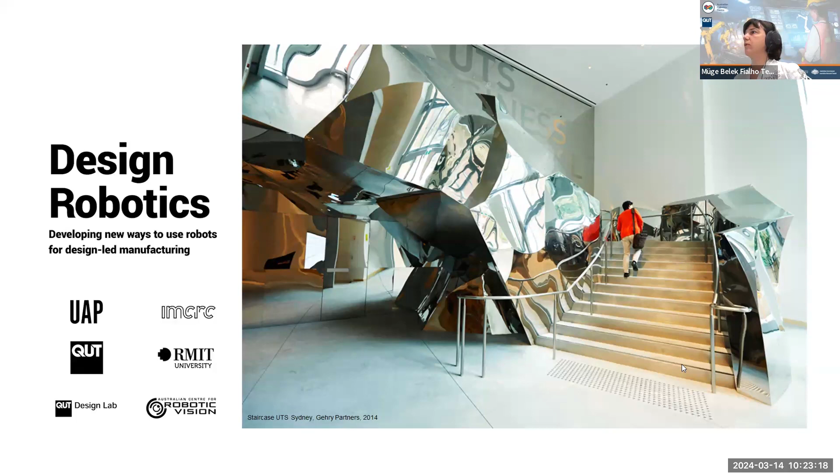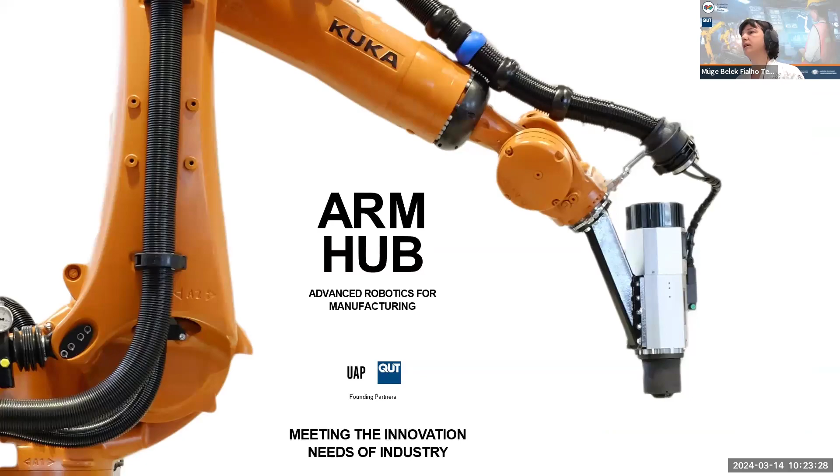It all started with my postdoc role at the Design Robotics project with QUT and UAP, where it was the first time that I started engaging with robotics technologies around the year 2018. That grew into my background, and I became part of Arm Hub, where I get to meet with industry, and now I'm part of the Australian Cobotics Centre.

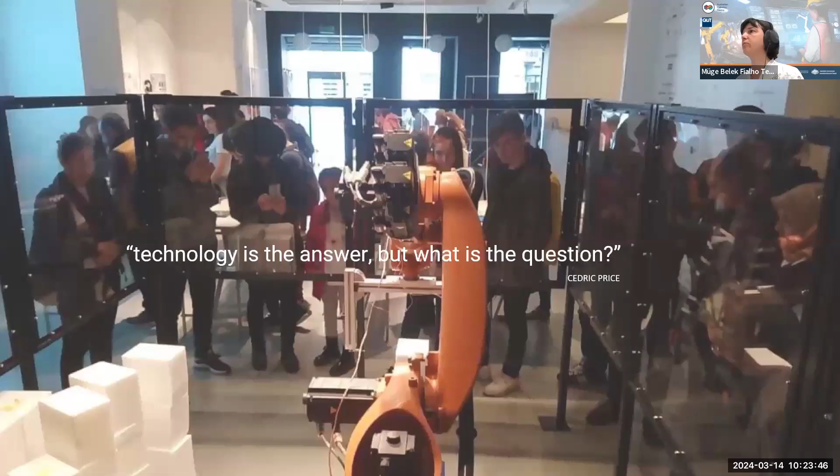So as a junior researcher who started as a postdoc and grew in this area of research, I have always been part of these very supportive and collaborative groups. So I wanted to discuss the topic of, yes, we know technology is the answer to our problems in this upcoming world, but as Cedric Price puts it, what is the question that we are trying to answer?

And we need to really think about how we engage with technology and how we use it, especially in today's conditions with the need for addressing the Sustainable Development Goals. How are we going to allow technology to solve the problems of today and for the future as well? So my research is really looking at these topics, and RoboBlox is a way to address the sustainability goals.

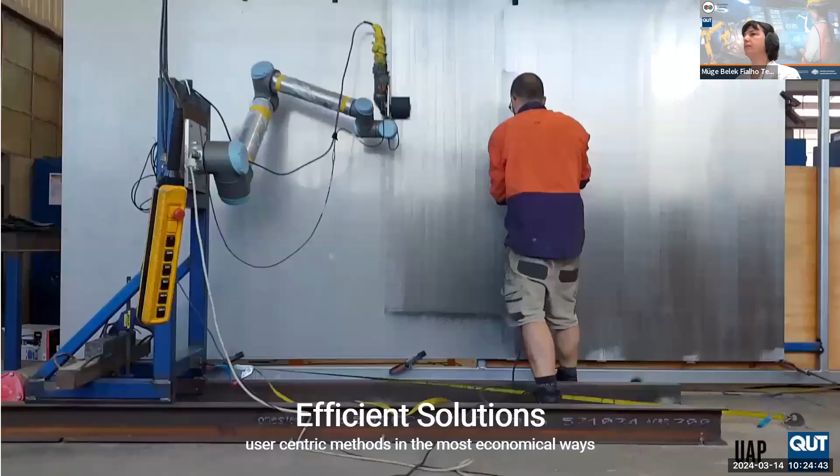So I believe in order to address the issues, we need to be more efficient in our ways of building and constructing. So we need to look at more user-centric methods, more economical ways to actually engage with the users of these technologies. But we also need to find optimized solutions, which are designed and built to use fewer materials, more efficient, more durable, and new efficient ways of constructing.

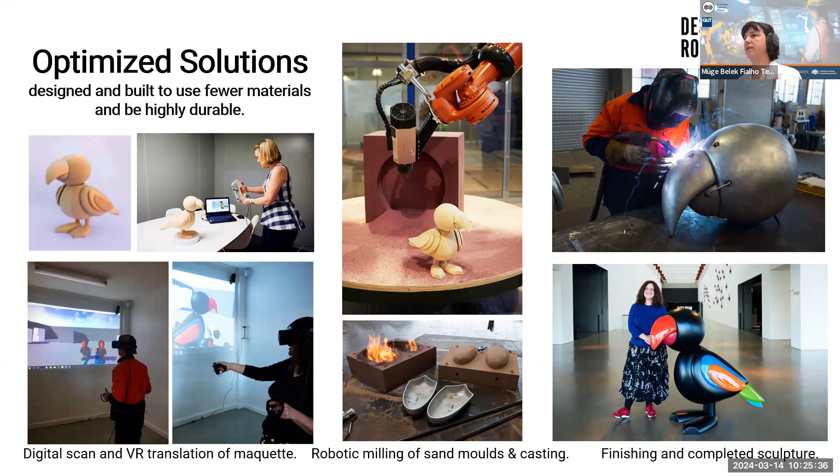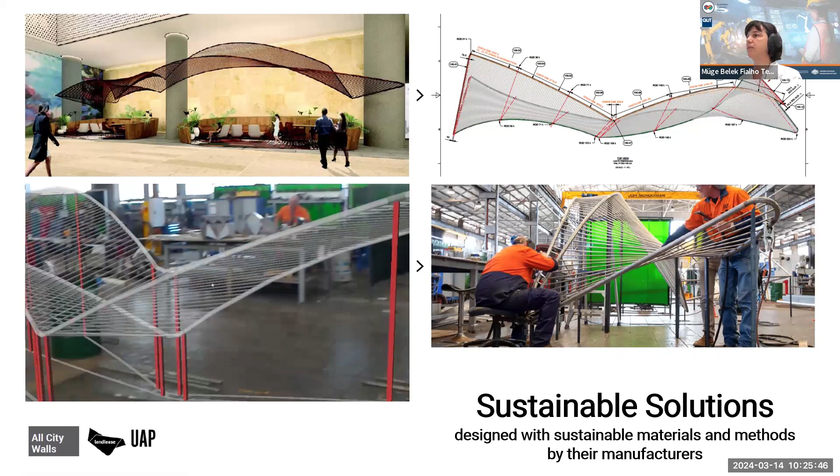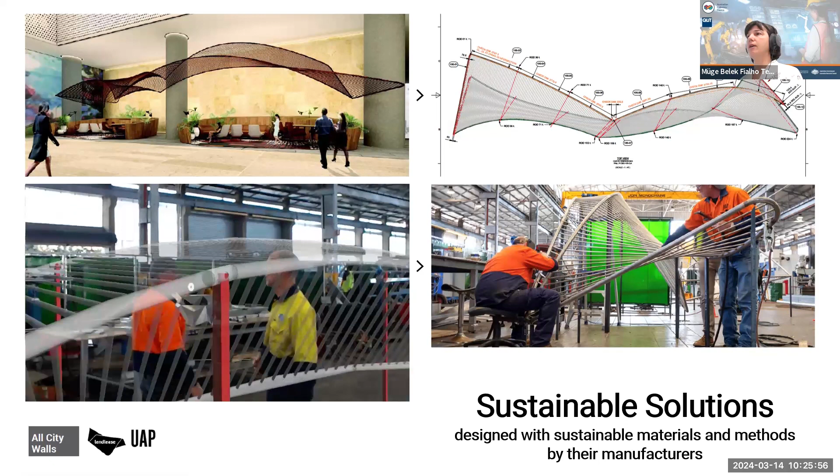So that's why the way I use computational methods and look at design to fabrication is the pathway I see in these optimization processes. And we need to look at sustainable solutions. And this is not just looking at sustainable materials and methods, but also involving the existing workforce and allowing novice users to engage with these technologies to have a more sustainable outcome.

So most of my research is looking at this type of digital design to physical fabrication. I believe that this way we can empower the designer to be more in control in material manipulation and the manufacturing processes, and also allow opportunities for embedding different systems and sensors into their design workflows.

So I use this software called Rhino Grasshopper, which is a 3D modeling software for designers. It was actually initiated for industrial designers. It was a software that would allow you to do 3D scanning and then also create these more fluid geometries, which are more ergonomic for the human body. So industrial designers started to explore these dynamic forms.

And in architecture, we realize as we are thinking in this geometry and the spatial way, we can actually engage with it in a way that we can design any form and then think about the way we can manufacture it. So find ways to actually create these kinds of digital to physical workflows.

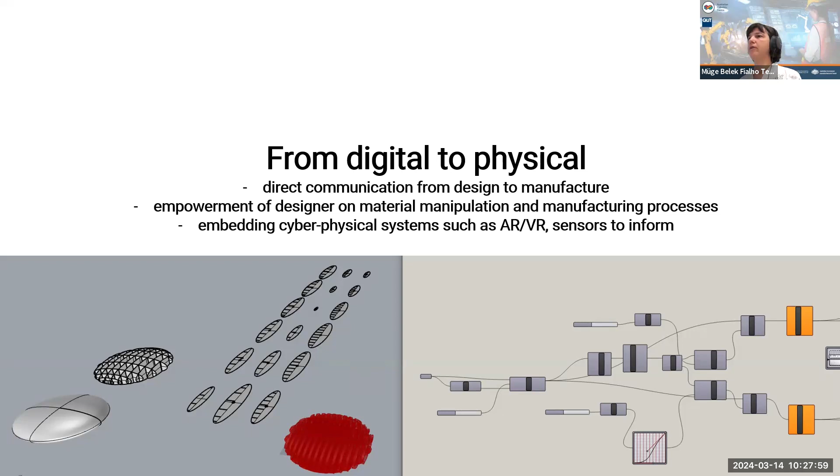And then it started to evolve into this visual programming language, which you can see on the right-hand side, where, again, as designers, we are very visual. So we start connecting different elements, writing some code to bring in other sensors, embedding Arduinos and other tools to create that kind of feedback loop from the environment.

Going back to RoboBlox, the first opportunity arose when we were invited to participate in this Istanbul Design Biennale. And the topic of the Biennale was a school of schools. So it was about the learning and the teaching of these technologies.

And we were invited by this group, Istanbul-based designers called FAB, which had this industrial robot, and they wanted to place it in the art gallery, and they wanted to invite different people from all over the world, so that everybody could show their design thinking and design processes in order to build the exhibition over a period of time.

And as part of this proposal, they wanted us to engage with students and run some workshops to be able to teach these technologies. So for us, it was a great opportunity because we were also just about to start our learning of using the robots. We had just purchased our UR10s, and it was a way to accelerate that knowledge for us too.

So the FAB group, they gave us different themes to explore as part of this exhibition, and our team was emergence. So we went back and looked at this Morpholo game, which was designed by Thieri Foulc at the time, where they were looking at creating these very organic design tiles, ceramic tiles.

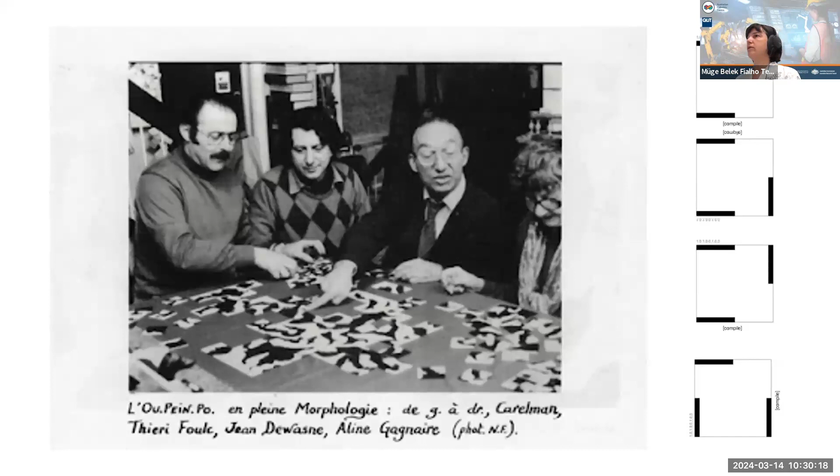So we took this two-dimensional game and started to explore ways how we can think about it in a three-dimensional manner. So here you can see Jared and Ellen acting like the robot in the workshop, and looking at ways where we can create these three-dimensional forms. And it was really a hands-on experience around understanding material, understanding how a craftsman would engage with a material process and build upon it through that manner.

And then those explorations, we wanted to engage novice users because we knew that robotic processes were not so easy and accessible for people that had never even seen a robot before. So the idea was to create this website, and you can still play the game if you go to JaredDonovan.com. You can see the Morpholo Games versions there.

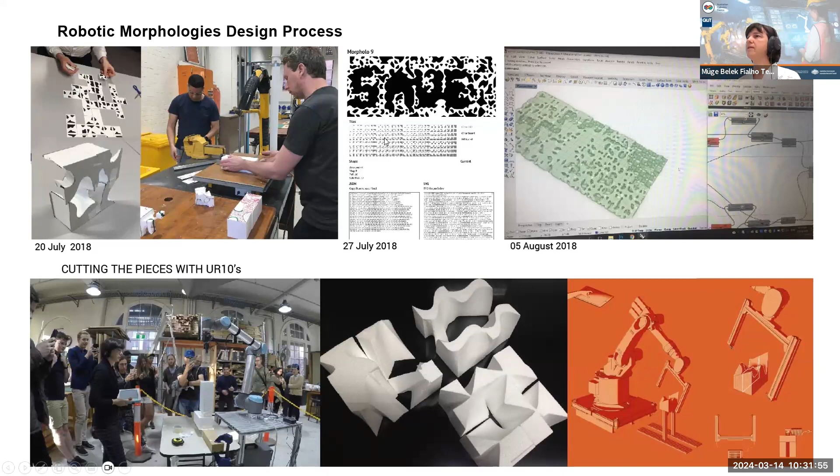You can go into this website and design your own patterns, and then the Grasshopper Rhino code would take those patterns as a JSON file from that server and then create a three-dimensional form. So we did some tests with the students. They came up with some designs.

This is the website where you can go and engage. So you can see the edges match, and then you can play with the rotation of each tile. You can manipulate the curves as you like, whether you want to have a more geometrical surface or a more fluid surface, and then you can change any tile as you like to design different patterns.

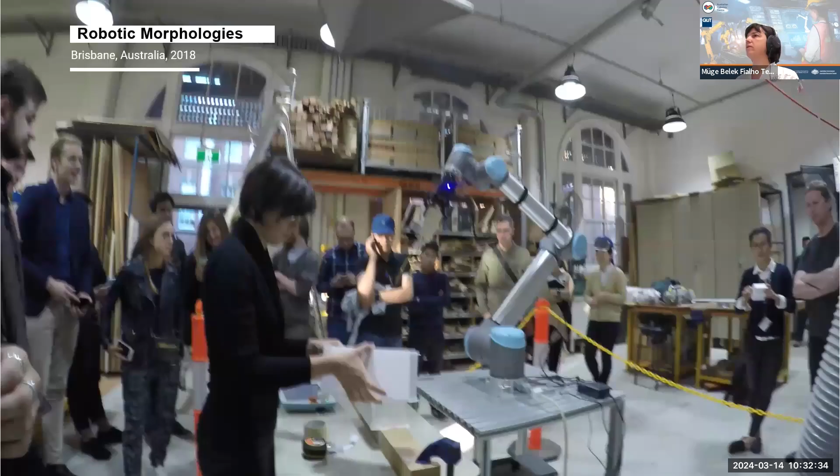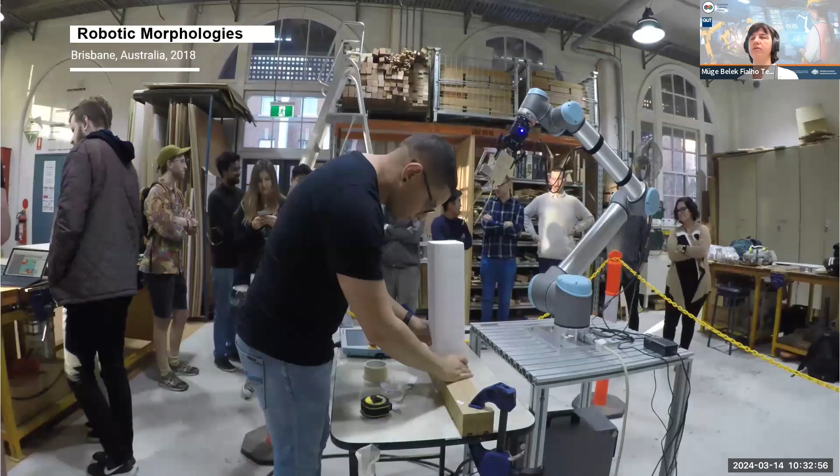And here are some of the examples of what each student could come up with, testing the potentials of such a system. So going from this interface, then we did a demonstrator where this is the first time we took an existing handheld hot wire cutter, a hobby tool, to go and cut one of the blocks in our J block. And it was a very exciting day for all the students because they had never seen a robot doing anything in a workshop.

So here you can see that workflow. This is the interface of our software where we can see in 3 dimensions what we are designing, and we can also simulate the robot's movements based on that. There are different plugins that you can use, depending on your robot type.

So if you are using a KUKA robot, then there's a plugin called KUKA PRC, and it has a very big community around it. It has a forum where you can ask questions and find out what other people have done with the software. There are free tutorials as well.

And then, what we are using currently with our URs is the Robots plugin. So that's also an open source plugin where you can control different types of robots like KUKA, URs, FANUC, ABB.

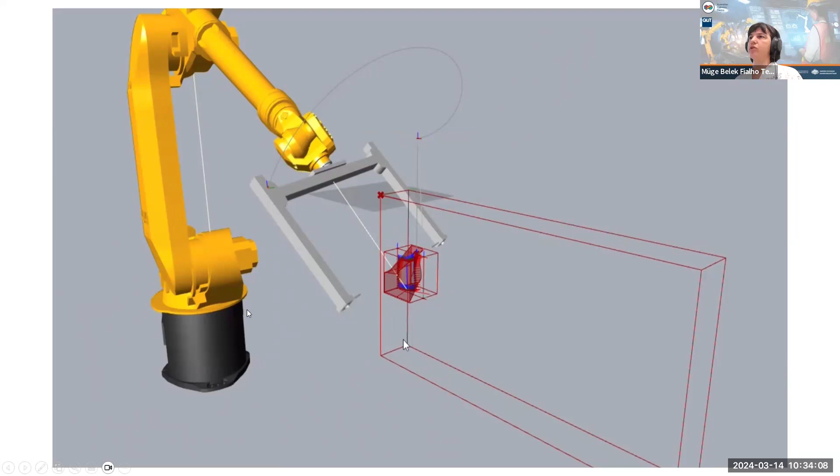So basically it simulates the robot's motion based on the geometry. So this work, we worked on it here with our URs, and then we sent the code to Istanbul. And in Istanbul, they used their KUKA robot and their end effector to actually run this in the art gallery.

So this is an image from the day when the event took place. And they were saying it was just an amazing experience because people were so curious to see how the robot actually builds things and what the outcomes are.

We were very concerned coming from Australia. Our health and safety regulations are much stricter than in Turkey. I don't know if we can do something like this with an industrial robot in an art gallery here in Australia, but yeah, I'll show you another example later on with a collaborative robot.

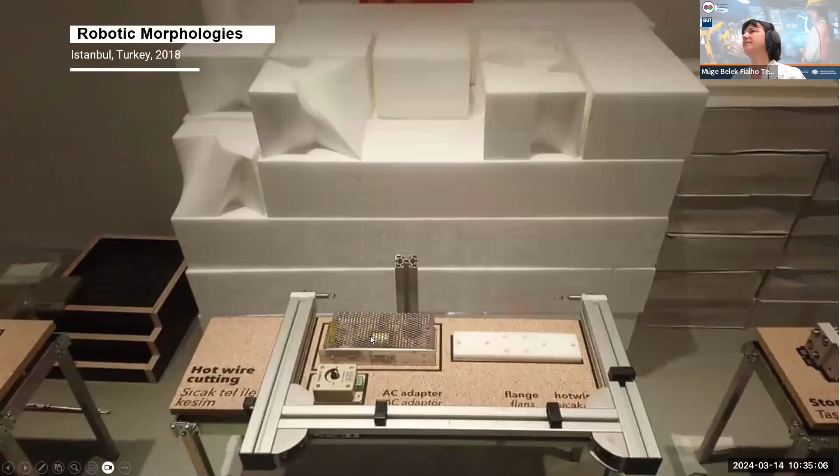So as part of the exhibition, they also exhibited the different types of materials and the different types of end effectors. This was our corner with the wire cutter, and I guess the reason why we chose hot wire cutting was that it was the easiest tool that we could start making things with.

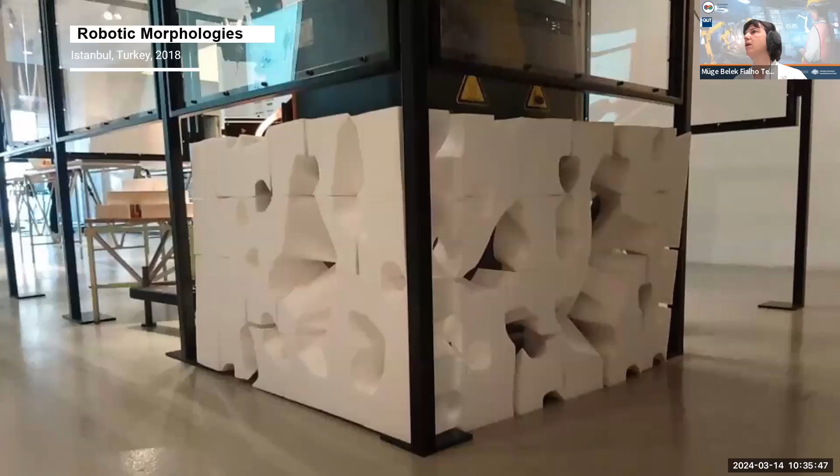We didn't have much experience at the time, and we wanted to be able to create an output, and we wanted to translate that hands-on, hobby-like experience to a robot. This was the exhibition piece, which was being built in the gallery and exhibited there.

After this exhibition in 2018, we were invited to be part of the Brisbane Art and Design. And this time we had a chance to actually think a bit about how we can utilize this system as designers ourselves and to be able to build it and present it in a different manner here in Brisbane.

This was our exhibition corner. We had this big kind of wall mural, and some of the parts are now here behind me in the blocks. Half of it, and half of it is leaning on the door here. And we had three parts to our exhibition.

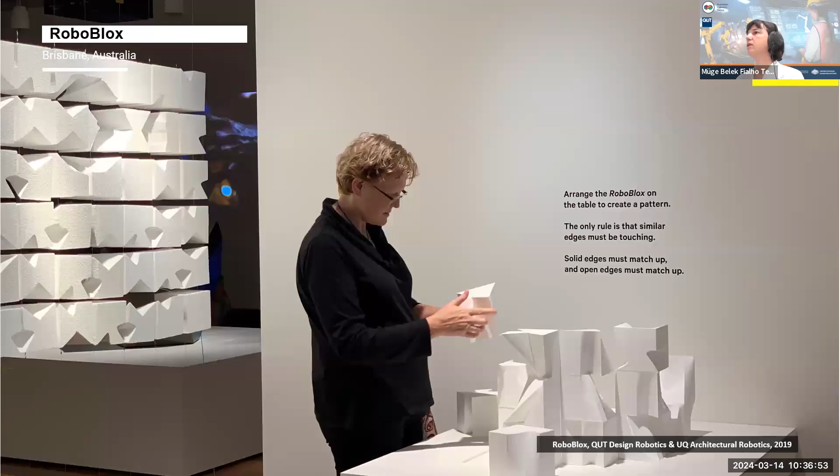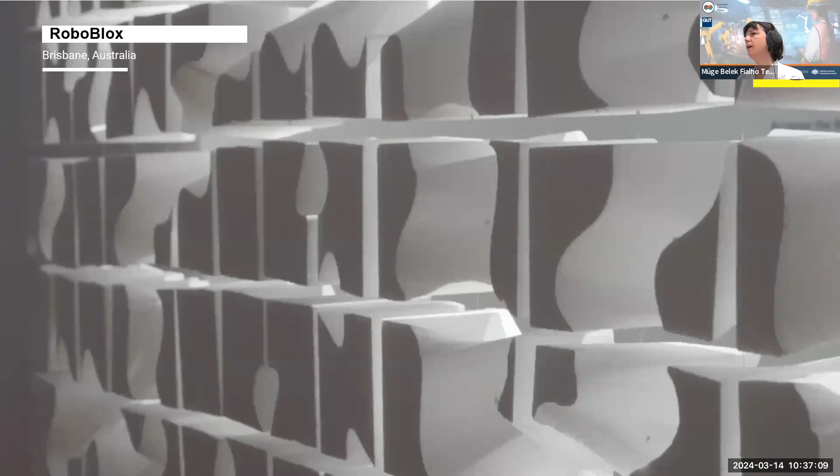We had a video that explained the process of how we engage the novice users and how we build this design process. And we also had this table where we had 3D printed some blocks where the people that came to the exhibition could play around and experiment with the designs. And then it was exhibited for a couple of months there.

But I guess the biggest concern that I had for this exhibition and the previous one was the material that we had used, because foam is a very toxic material. So when you are working with it, when you play with the material, it starts to create toxic fumes. So I'll just run this in the background. Maybe put the volume down. So it creates toxic fumes.

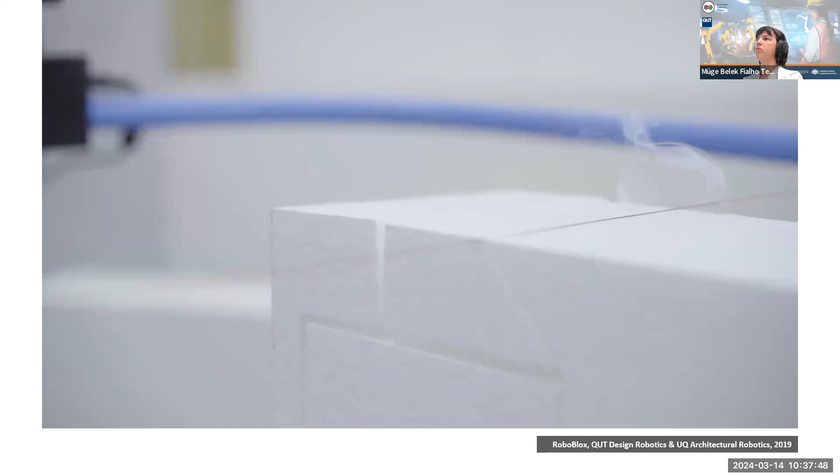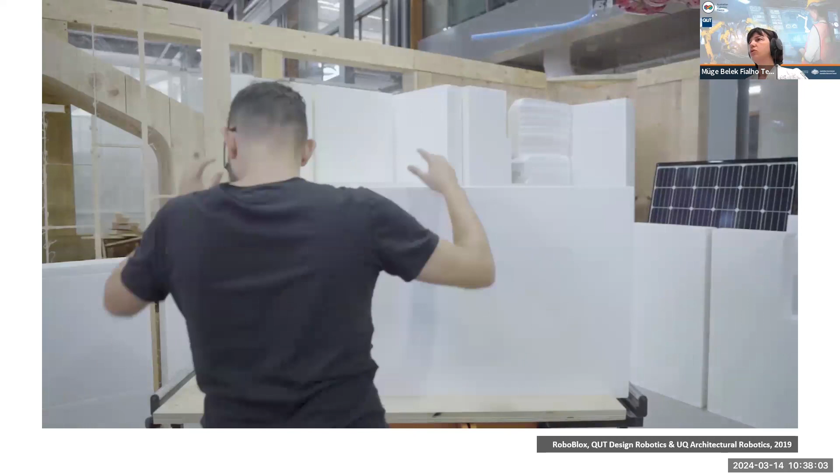I wanted to move away from this material and look at ways where we can actually build this system in a more sustainable way. So for the exhibition for BAD, we had many pieces. So we used industrial robots at UQ. So this is the UQ lab where we calibrated the KUKAs.

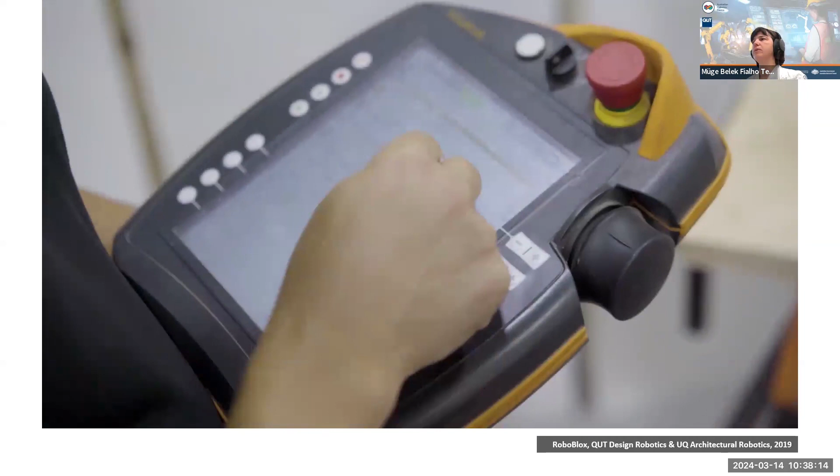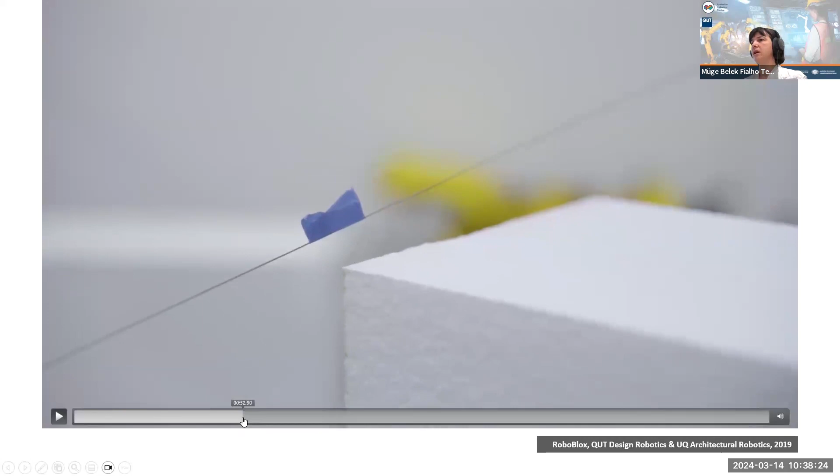So KUKAs are much different than URs. They need a lot more precision and calibration process. So here we are calibrating where the material is, and it's a very tedious process. And then the robot would just go in, I'll just fast forward some of these, and cut into the material. There were a lot of learnings about how we can actually use the material and the hot wire cutter.

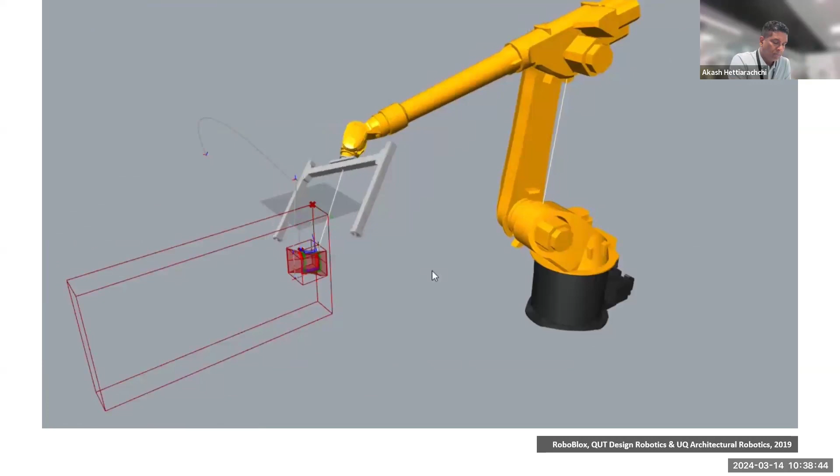Sorry. Is someone talking to me? I couldn't. Or maybe it was an accidental unmute.

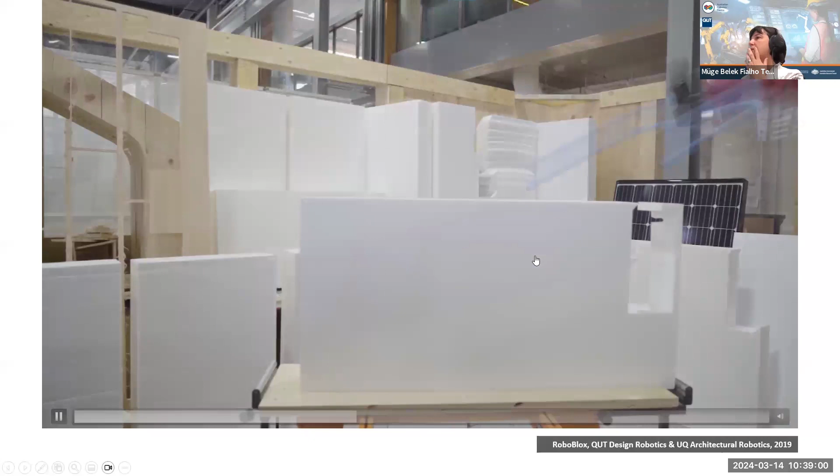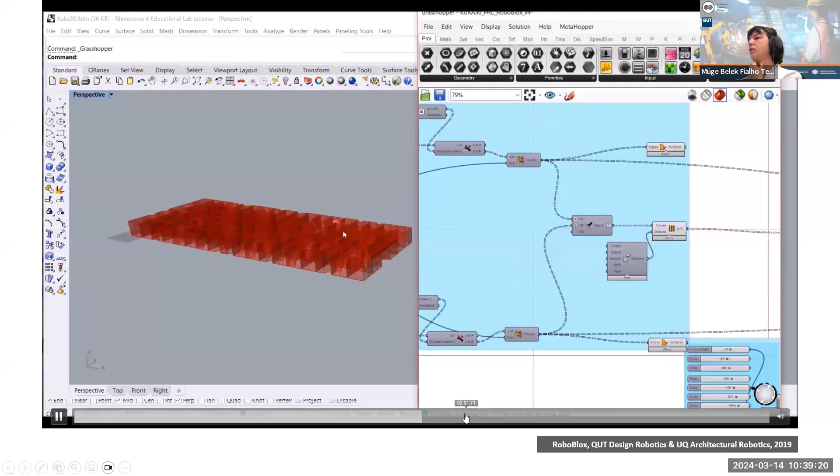Yeah, so with the different materials, I guess things that we had to pay attention to were the speed of the robot and the way it gets into the material. It really has an effect on the way the blocks cut. So there were a lot of learnings from there about the robot's motion and how we can control it. And here you can see that learning, and there were some minor precision issues that we explored. And then this was the final outcome of the work in the gallery space.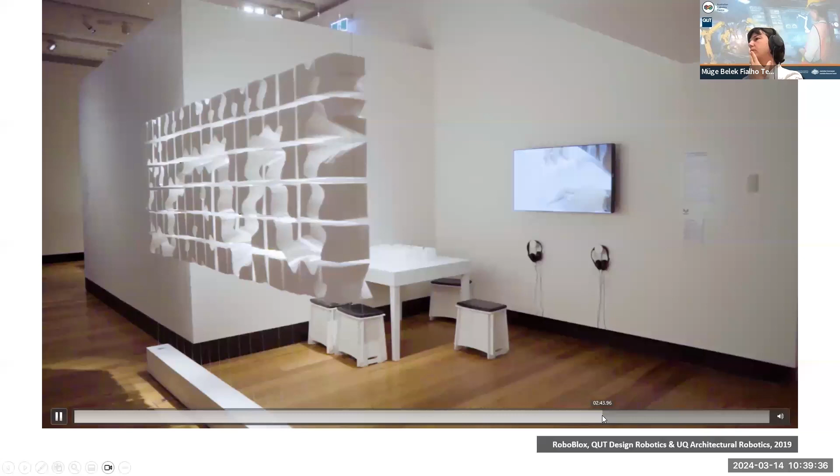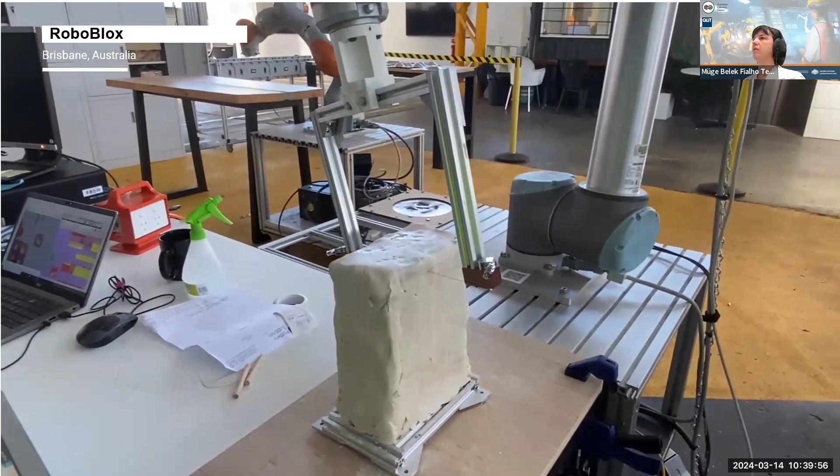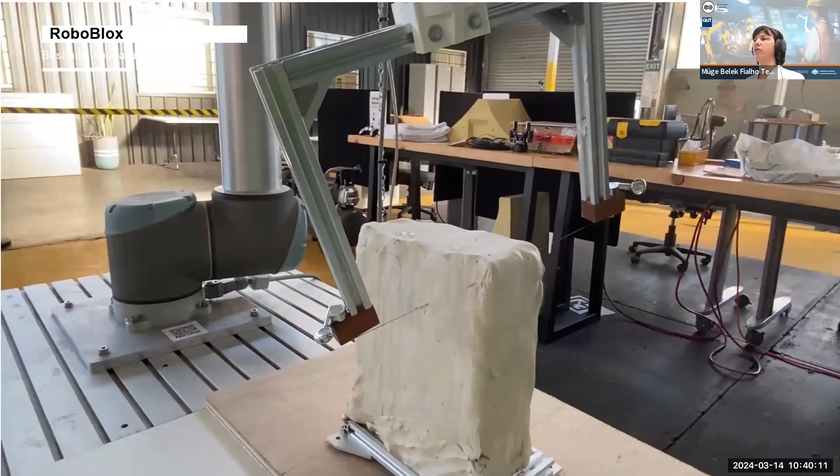Going forward, like I say, I was very concerned with this material, so I wanted to explore other types of materials. So we built another type of end effector with Mia at the time and Anthony. And then we used a guitar string to actually carve into the clay. And as the material changed, of course, the frictions change, and the way the robot responds to that change and the precision of cutting becomes a different story.

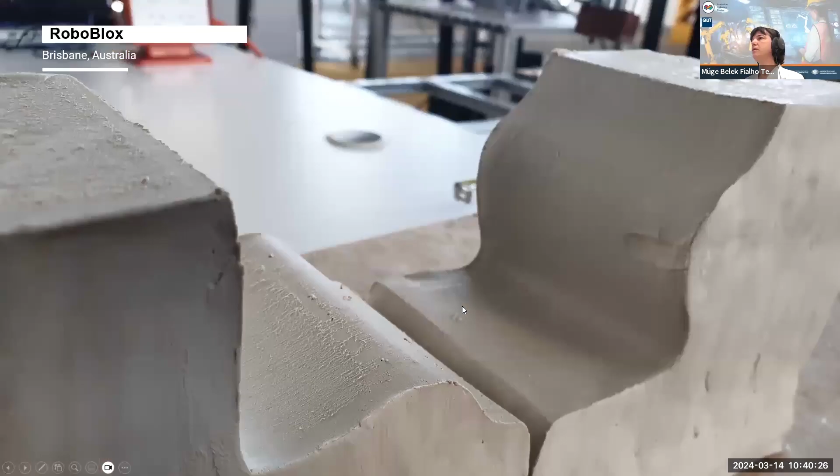So here you can see how the clay comes out after it's been cut. And then this one was exhibited in the 2021 BAD exhibition, but it was just a window display instead of a piece within the main gallery space.

And it was a new learning as well. So with clay, we find out that you can't really fire it, so you need to air dry it. But then during the air drying process, the material shrinkage changes depending on the different types of humidity within the day. So then the block's precisions might not necessarily be ideal for this kind of a process.

And I started engaging with the industry partner, Brickworks, to talk about whether they would be interested in this kind of a bespoke design of a brick element for future collaborations. And that led us to our recent grant with Brickworks for the Building 4.0 CRC. So this kind of an exploratory process also has other outcomes for researchers, I guess, and for industry as well.

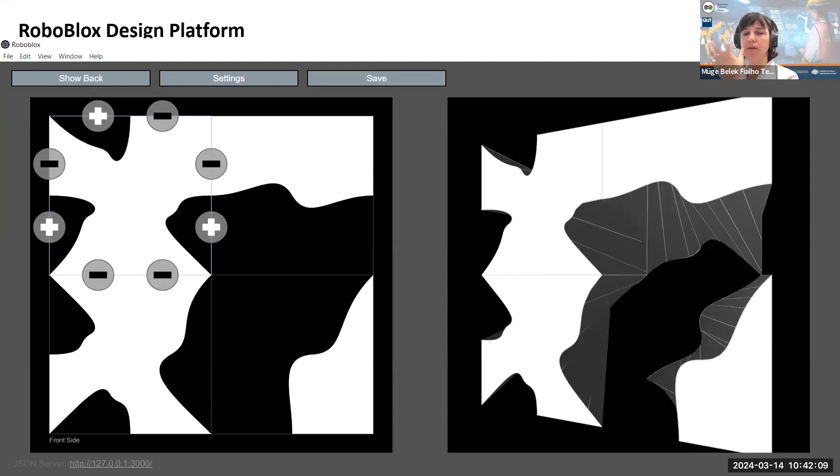The project was then invited to be exhibited in 2020 in the Tin Sheds Gallery in Sydney. For this one, we looked at rethinking our app, our web design. So Jared developed this app based on the same rules, but we could see the design in three dimensions much better. We were more in control of the curvatures and the design parameters.

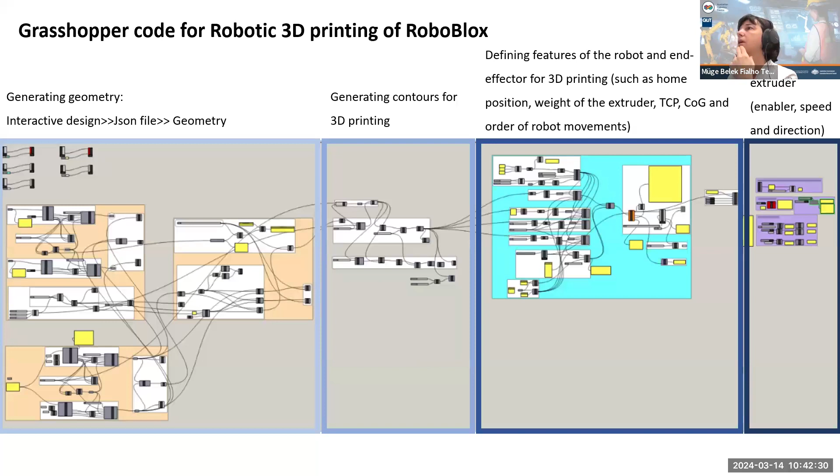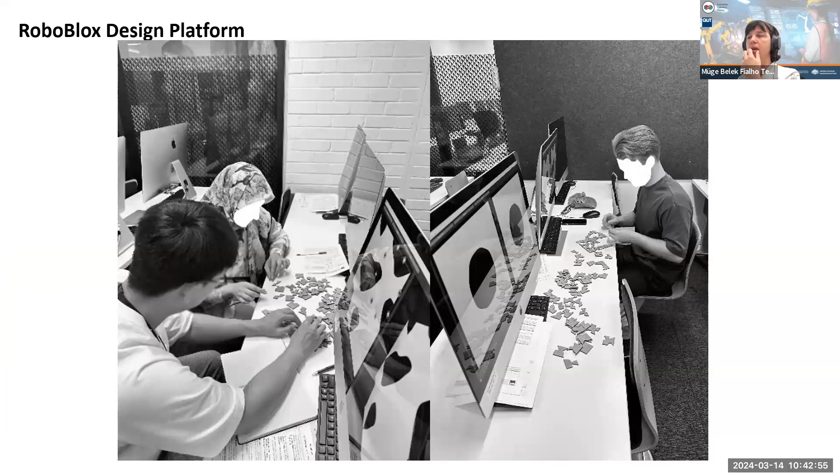And then the system works similarly, but this time instead of sending it to a wire cutter, we looked at 3D printing with clay. The geometry would be sliced into a 3D form, and then those slices would be 3D printed. And we also ran a workshop with the users to actually test this app and test this interface. And they were students that have never used a robot or never have used a computational design process. So there was a mixed group.

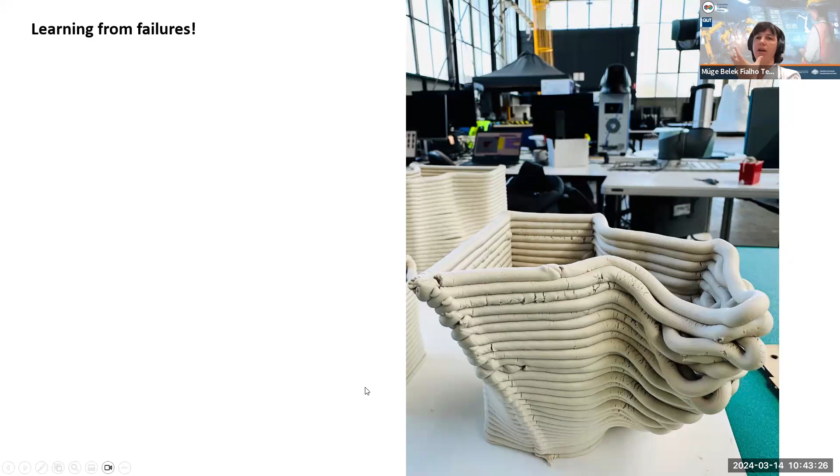We purchased this end effector, which is from 3D Potter, and we started 3D printing with clay. You can see the different experiments, different learnings, and failures, and learning from failures to actually find out the material qualities, the viscosity, the elasticity, the ideal mix types, and how to be more in control about form and different types of printing processes and layers.

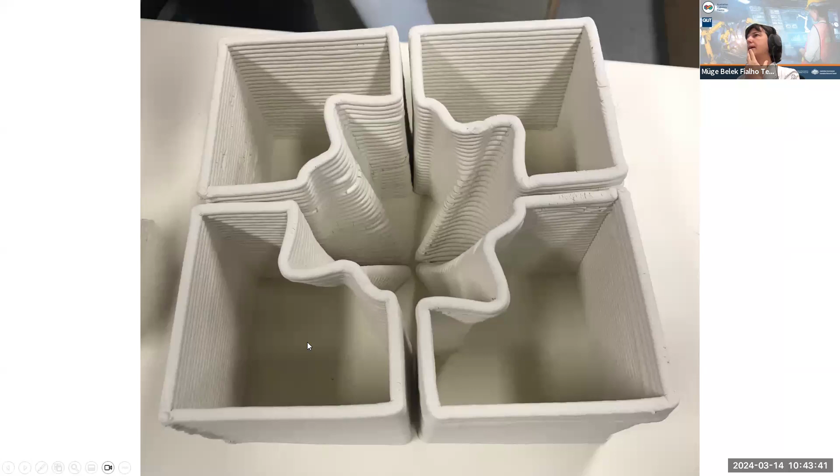And then here are some of the samples, and these ones we could actually fire in a kiln, so they became more like a product rather than experiment.

And here you can see some of the, sorry, I just exploded your ears.

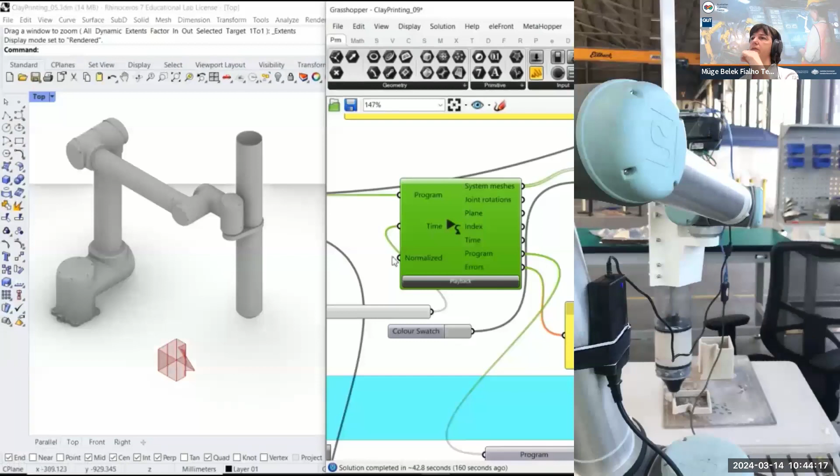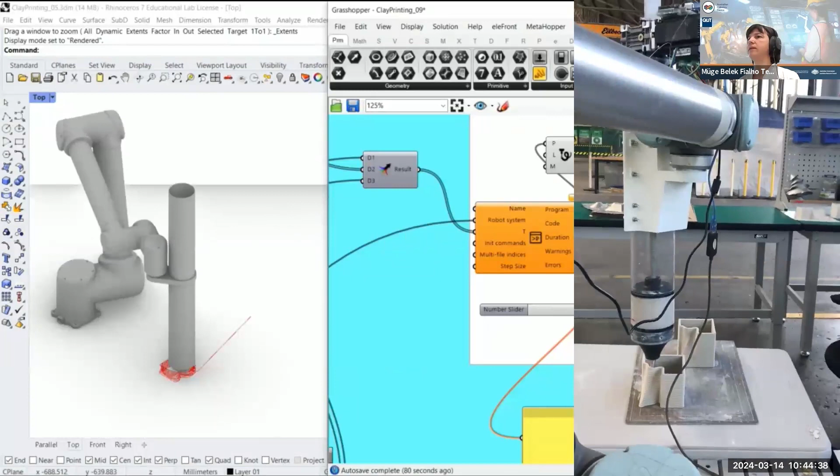But you can see the printing process and the way it's simulated in the program. So the way we slice the geometry, it identifies these planes, and then the robot's end effector tip is aligned with those planes, so it just follows that. And this is the way the program simulates for us to be able to use the robot. And because we are all designers, we are familiar with the software, it's very easy for us to actually understand and observe the robot's movement in that way. And if there are errors, it also informs you about the errors as well.

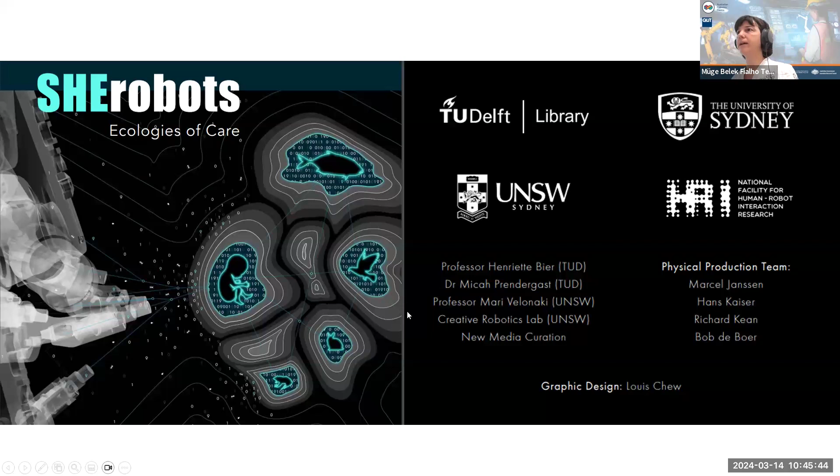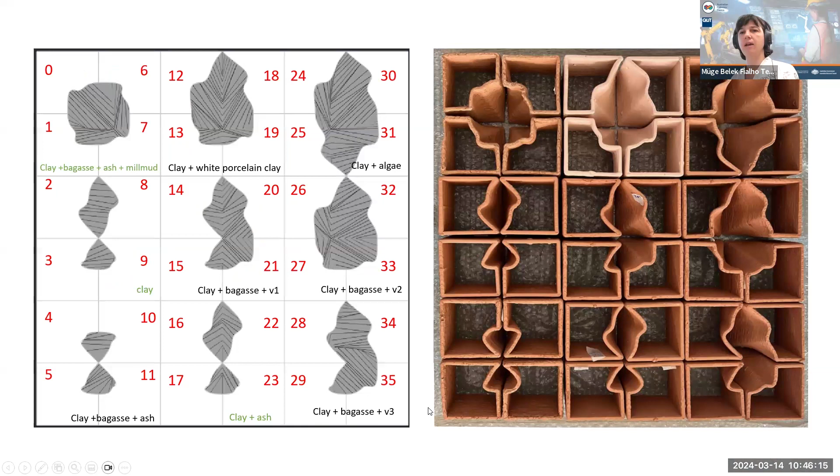This year's theme, Ecologies of Care, is looking into more sustainable practices. And we this time wanted to explore a bit more sustainable material mixes. Our PhD student, Ahmed, is looking at utilizing the waste that comes out of the local agricultural stream of sugarcane. So he's creating these mixed recipes as part of his PhD. And we managed to use some of that in our printing to actually test the potentials and the challenges that come with those material mixes.

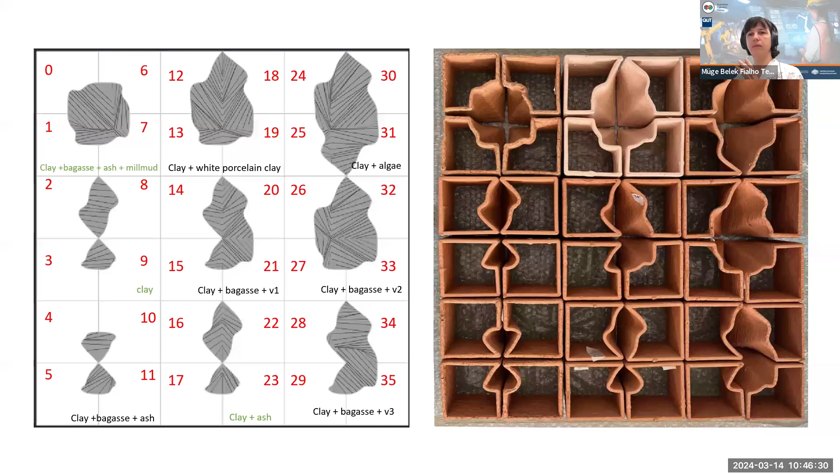Here you can see the parts. We have 3D printed 36 pieces. We wanted to explore a repetitive pattern that changes over time using our app. And then each one of them had a different type of material mix, starting from the bagasse to porcelain clay to algae, and different levels of bagasse materials. So some are more textured and some are not. And again, there were a lot of learnings.

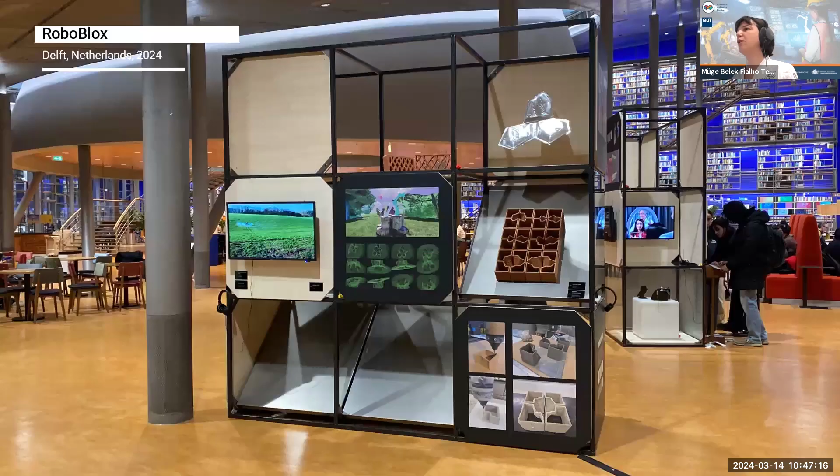We packed it and put it in our luggage to take it to Delft, and did a natural compression test with Emirates taking very good care of my luggage. So at the end, some pieces unfortunately broke, and that was a good learning as well, because we know now what a compression test can do to different material mixes. And here's the final exhibition piece that is now on display.